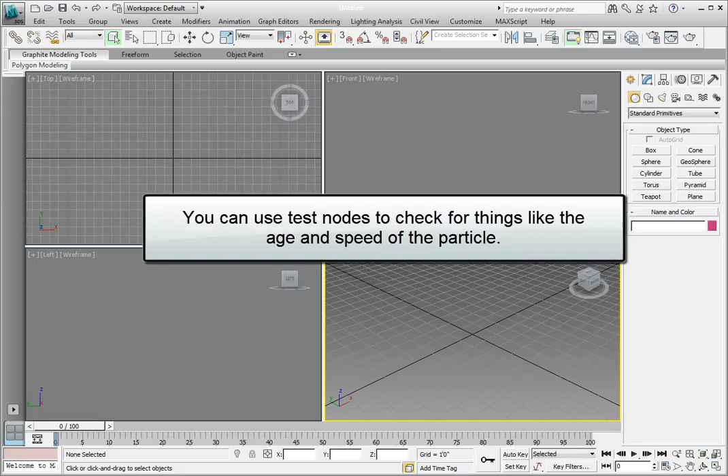Test nodes can be added to each event to test particles for various parameters, including the age of the particle, the speed, and whether it has collided with an object or not. Based on this test, a particle is then sent to another event that redefines that particle based on the parameters within the event. This process of connecting events provides for an extremely flexible particle creation tool.

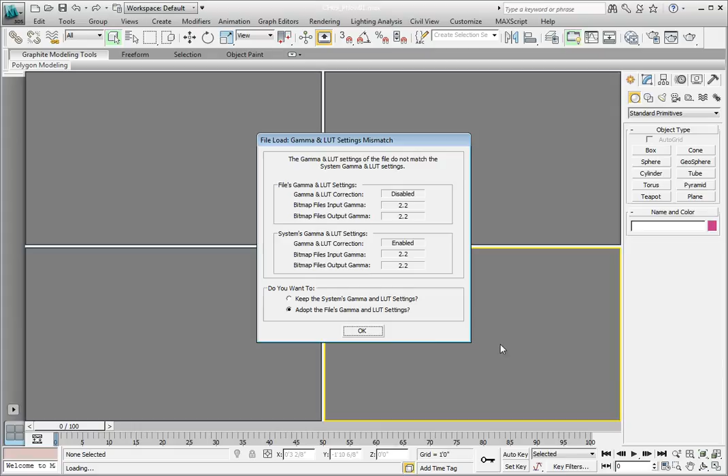In this lesson, we'll create a very simple multi-event particle flow that simulates a swarm of bees flying from one hive to another, then to a third hive, and then slowly flying away from that hive. Let's go ahead and open the file Chapter 9 pflow01.max from the Chapter 9 datasets directory in our current project directory. You'll see this scene is a very simple scene with 3 poles and 3 beehives hanging from them.

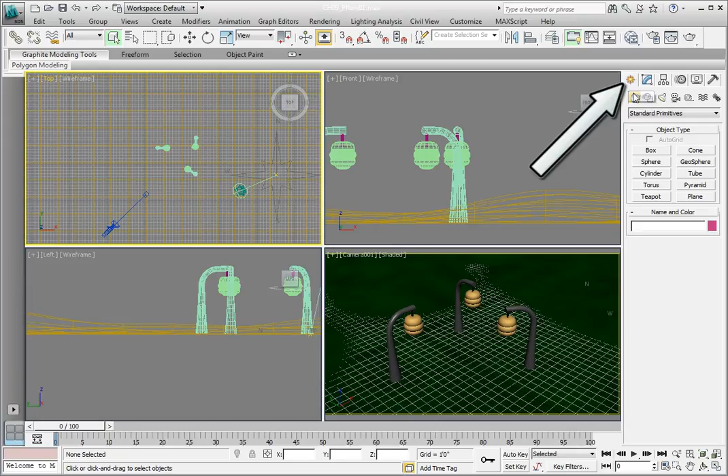First, we need to add a particle flow source to our scene. Do this by clicking on the Create panel, select the Geometry option, then select Particle Systems from the Geometry drop-down list. In the Object Type rollout, click the PF Source button, and in the top view, click and drag to create a particle flow emission source. We'll leave the name as the default for now.

Go ahead and click on the Modify tab. Then in the Particle Flow Source Setup rollout, click the Particle View button. This opens the Particle View dialog. The first thing we want to do is change where the particles are initially emitted from. We're going to leave the birth of the particles alone, and currently they're emitted from frame 0 to 30 with a total of 200 particles emitted. That means that we'll have 200 bees flying around.

To do this, click and drag the Position Object operator on top of the Position Icon operator in the Event 001 box. You should see a red line appear. This will indicate that you will overwrite the old Position Icon operator with a new Position Object operator. Click on the Position Object operator. In the Position Object rollout for the operator's parameters, Emitter Objects options, click the By List button. From the Select Emitters Objects list, choose Hive 001, then click Select.

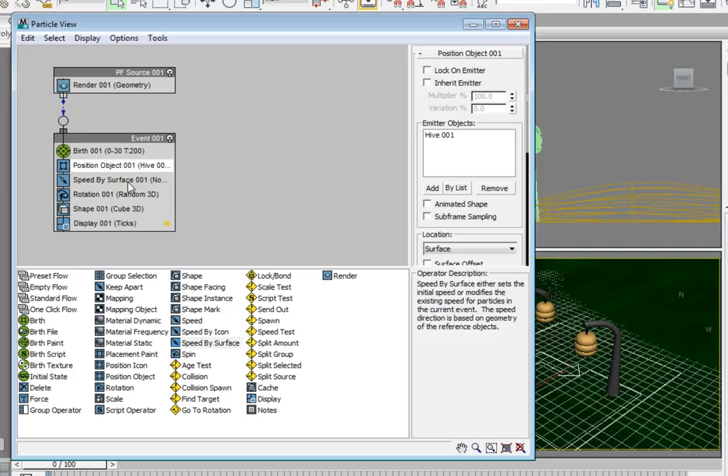The next step is to drag a Speed by Surface operator out into Event 001 and overwrite the original speed operator in the event. Select the operator in the event and change the speed to 6 inches. In the Surface Geometry option, click the By List button. From the Select Surface Objects list, choose Hive 001, then click Select.

In order to have the bees find the next hive, we want to add the Find Target Test operator to the bottom of Event 001. Click and drag the Find Target Test to the bottom of Event 001. You should see a blue line appear this time. Let go of the mouse button, and that will place the test as the last entry in Event 001. Click the Find Target event we just added.

In the Control By Speed area, set the speed to 3 feet 6 inches. This will set the speed that the bees will be cruising on their way to the next beehive. In the target area, choose the Mesh Objects option. This will allow us to choose scene geometry as the target that our bees are going to find. Go ahead and click the By List button. From the Select Target Object dialog, select the Hive 002 object, then click Select.

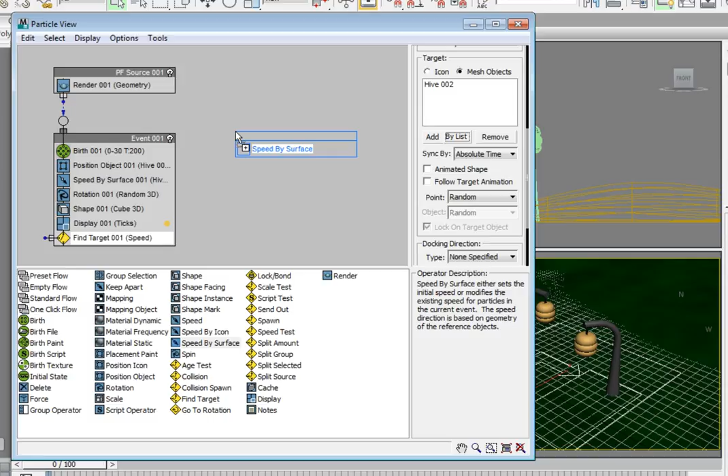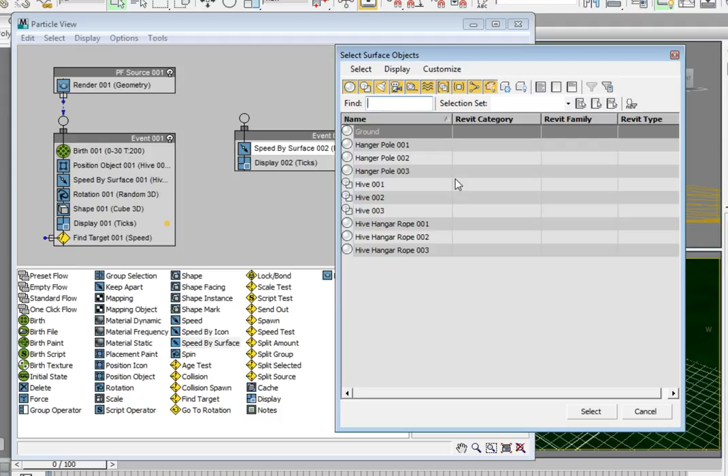Now we want to add the Speed by Surface to a new event. Click and drag the Speed by Surface operator to an open area in the Particle View work area. This will create Event 002. Click on the Speed by Surface operator. Set the speed to 5 feet. In the Surface Geometry option, click on the By List button. From the Select Surface Objects list, choose Hive 002, then click Select. This will set the speed of the bees once they get to the second beehive.

Now let's get the bees over to the third beehive. We'll do this by adding another Find Target test as the last operator in Event 002. Go ahead and click and drag the Find Target test to the bottom of Event 002. Click the Find Target event we just added. In the Control by Speed area, set the speed to 5 feet. This will set the speed the bees will be cruising at on their way to the next beehive.

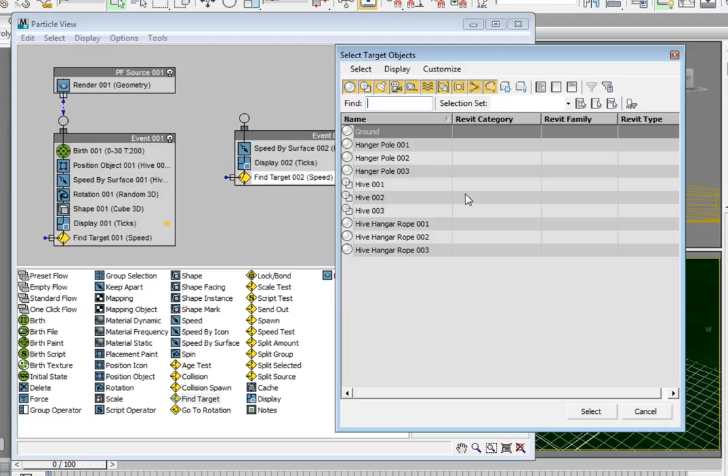In the Target area, choose the Mesh Objects option. This will allow us to choose scene geometry as the target that the bees are going to find. Go ahead and click the By List button. From the Select Target Objects dialog, select the Hive 003 object, then click Select. This adds the third beehive to the path of our bees.

In order to have the first Find Target test properly route the particles that meet the criteria of that test, we need to click and drag from the output node of the first Find Target test to the input node of the event. Go ahead and click and drag from the Find Target in the Event 001 to the input of Event 002.

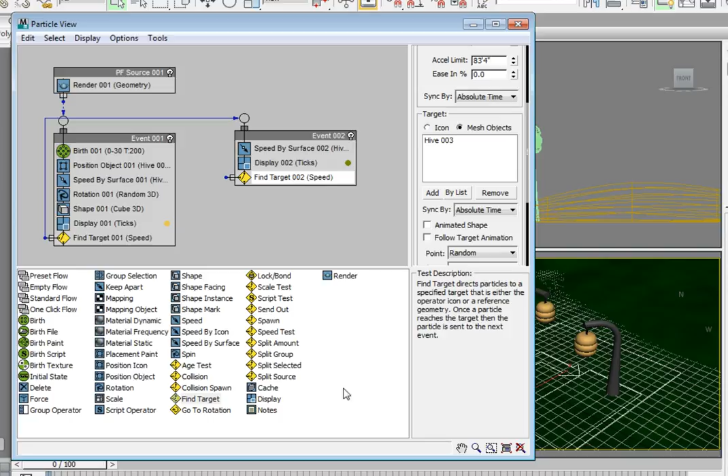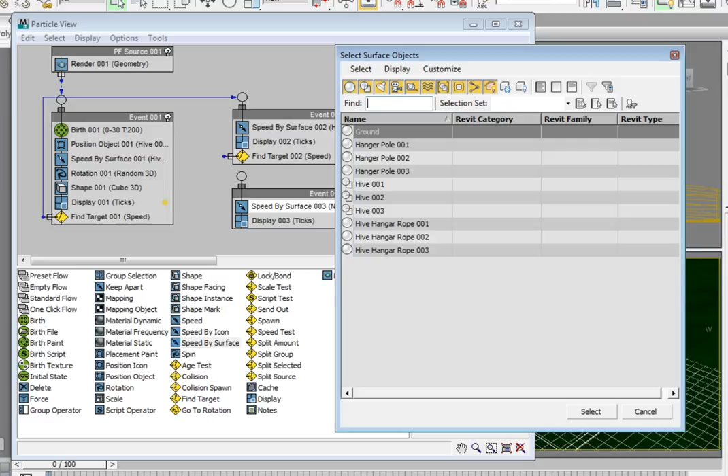Now we want to tell them to slowly fly away from the third beehive. Click and drag a Speed by Surface operator to an open area in our Particle View work area. Select the Speed by Surface. In the Speed by Surface Parameters rollout, set the speed to 2 inches. For the surface geometry, click the By List button. Choose the Hive 003 object and click Select. Now click and drag from the output of the second Find Target test to the input of Event 3.

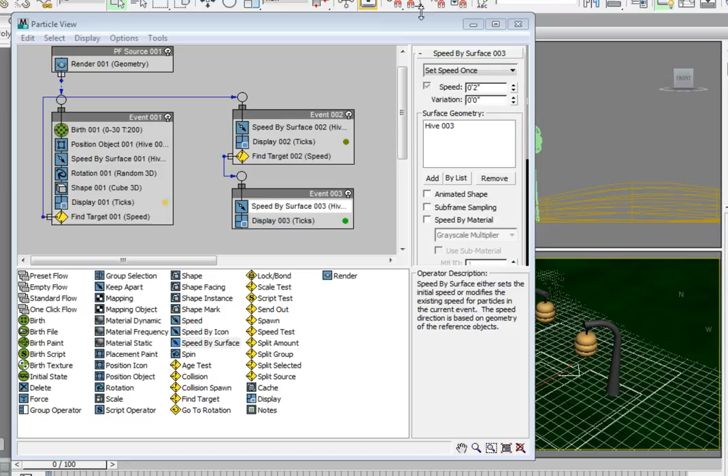Go ahead and play the animation. You should see the bees travel from the first beehive over to the second beehive, then turn and travel to the third beehive. Notice that with only 100 frames, we don't see the entire sequence of particle events.

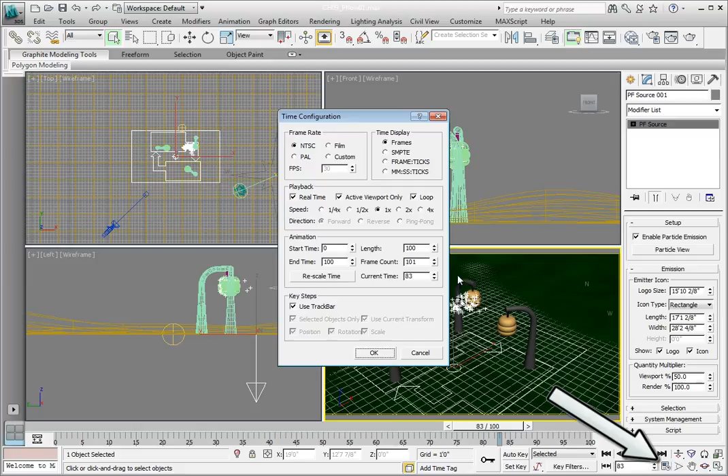Let's go ahead and click on the Time Configuration button. This opens the Time Configuration dialog. In the animation area, change the length to 500 and click OK. This readjusts the length of our animation to be 500 frames. Click play. You should now see the entire animation.